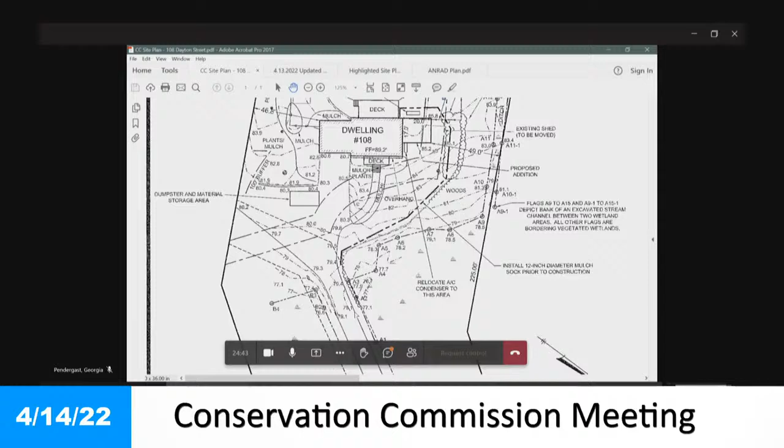You look at where we could put this addition, and this is the garage over here. You can't really walk through the garage and put the addition on. There's already a deck back here. You don't want to put it right on the front of the house. This is the only logical place to connect this addition, and the encroachment into the no-build zone is unavoidable.

Frankly, they would have liked to have had a larger addition, but through the architect and all through the process, we counseled them on the stringent requirements of your bylaw and minimizing the encroachment into the no-build zone.

Fortunately, this is a very big lot. It has an awful lot of land in the no-build zone. And so by the formula in your bylaw, you're allowed to actually encroach 20% into the no-build zone, assuming you've gone through the alternatives analysis and this doesn't have a detrimental effect on the interests of the act.

I've also given you a detailed discussion on that as well in my narrative. I'm not gonna go through all of your interests, but we end up, the grand total, ignoring the shed footprint, is 98 square feet, and that's less than 1% of all of the no-build zone on the property. So we're easily compliant with the criteria you've established in your bylaw to be able to grant a waiver.

The work zone is protected by a mulch sock right through here. We've offered some mitigation here in support of the 98 square foot encroachment. We show 100 square feet of area that's going to be vegetated with native shrubs - suggested the rhododendron, pepperbush, arrowwood, highbush blueberry. Other than the rhodies, they're all found in the adjacent wetlands, so it would be a nice expansion of the buffer zone. So it's a fairly simple project, fairly simple addition, and we're hoping the commission sees it as I see it.

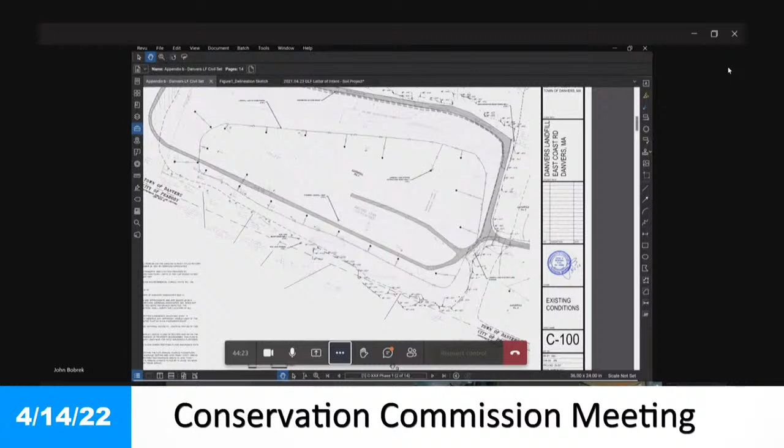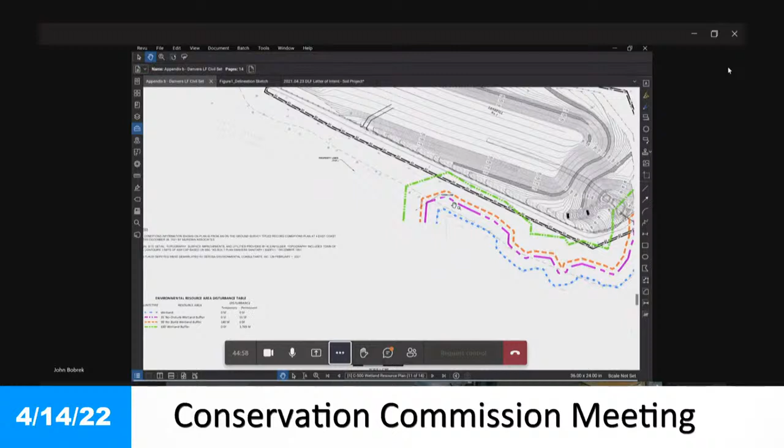Let me bring the next sheet up that shows the wetlands and the buffers. So this is our wetlands resource plan, and it shows the grades that we will be achieving by filling in this property. You can see there's wetlands to the south. The blue line on my screen is the wetlands line itself, which was delineated by DeRosa Environmental, and Mike is going to talk a little bit more about that in a moment. The magenta line is the 35-foot no disturb. The orange line is the 50-foot no build, and the 100-foot buffer is the green line.

So you can see we're along this area up here, we're within the 100-foot buffer, mainly for erosion controls. We've elected to install erosion controls on the outside, in this area outside of the access road, mainly because this site is going to be filled with soil over a 2-year period. So we're going to have soil moving operations going on, and I don't want these materials to be entering the slopes and potentially making their way around. I don't want any disturbance to be uncontained, so we have the erosion controls on the outside of the roadway.

Erosion controls are just going to be in the buffer zone to the east and to the north of the site. You can see there's no land disturbance generally within the buffer except for this eastern side. As I mentioned before, all the stormwater enters this general area of this low-lying portion of the site.

We are mimicking the stormwater patterns by creating a sloped top of site, which is going to discharge into a stone-lined swale, also lined with a landfill liner, an HDPE geomembrane. So once stormwater makes its way into the swale, it's off of the landfill itself, because the water will not be able to penetrate the swale.

Yeah, another great question. So we do have a plan to have a wheel wash device on site, and there's also a sweeper on site at all times. The asphalt roads are going to be swept, and there's also dust suppression in the stormwater pollution prevention plan, which includes broadcasting calcium that binds up soil and keeps dust down. There's also going to be adequate gravel and asphalt millings stockpiled on site, which the roads will be top dressed with to try to keep all the dust down as much as possible.

Okay, that's all I had. Okay, thanks Chelsea. Ann?

And you were referring to the stone-lined swales, the plunge pool, that you were going to do some reconstruction to slow the water down. What specifically were you referring to?

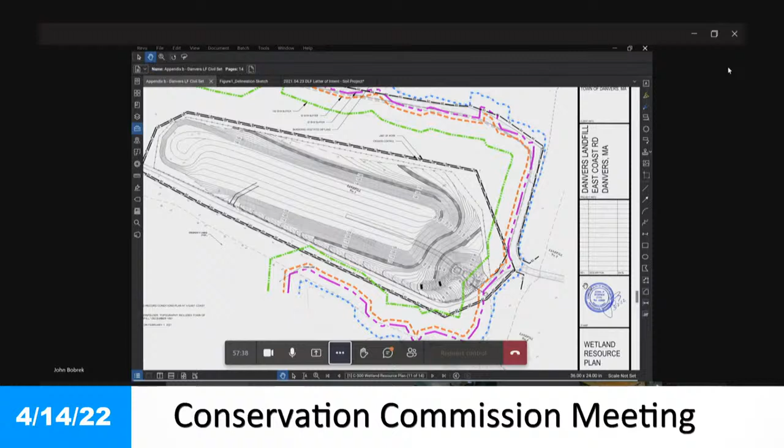So with the fill soil, there's going to be a modified stormwater pattern, but it's going to ultimately discharge in the same location. Currently, maybe I should go to the sheet. Bear with me for one moment, I can't remember all my sheet numbers.

So currently the stormwater is captured in this low-lying section along the access road at the bottom of the mound. There's an existing swale at the toe of the slope right now along the access road, and then there's a leaching catch basin here which collects the stormwater, or the stormwater runs across the road and into the swale, which discharges into the wetland. So there's a stone-lined swale in this location.

So with the work that we're going to do, we will be installing this new stone-lined swale along the southern edge just before the access road, which will have some stone check dams to slow the velocity of the stormwater down, and a plunge pool to collect the stormwater, which will then overflow through a level spreader into this detention pond. And then we will have an outlet orifice. I have a blown-up sheet of it also.

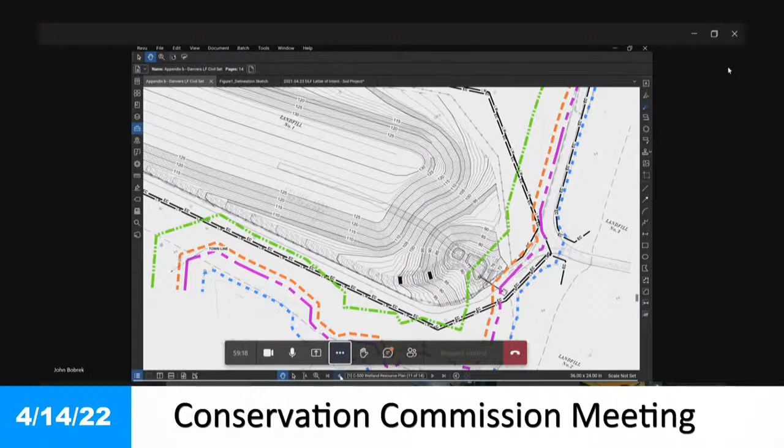So this is the actual blow up of the area. There's an outlet orifice that's going to be constructed, a precast manhole, which will have an outlet pipe over to the existing stone-lined swale area. So like I was saying, it's more or less mimicking what's happening now, except we're going to have a lot more treatment of stormwater than we did before. And this meets all of the Mass DEP stormwater design standards, where currently it's just a grass swale. So this will take down any suspended solids better than what's there.

And it sounds like that will have to be continually monitored over time as you increase the amount of soil in the middle. Is that correct?

Well, this will be like a permanent solution. There's gonna be some temporary measures during the filling process, like a temporary pond and temporary erosion controls to control any stormwater that has sediment in it. But when we're complete, this will be a permanent stormwater solution for this site. The site will be vegetated, and this will be a stone-lined swale, and this entire property will be maintained for a minimum of 30 years through the Mass DEP requirements.

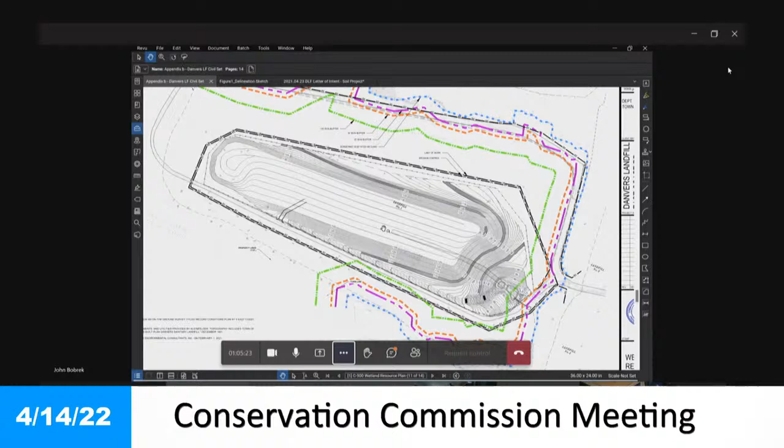Okay, and you're not anticipating any different stormwater impacts during construction that can't be handled by what you have there already? Is that a fair statement? No, that's why one thing we're working with the Solid Waste Division is some additional interim sketches and markups of what we could do. A lot of these things are subjective and up for discussion when you get a contractor on site, based on different people's experiences. But overall we're going to have a couple temporary basins and check dams to slow any runoff down, provide treatment, and control the area as much as possible.

Okay, could you give us an overview of how trucks will proceed when they come in to make a dump? Sure. Part of the submittal to Mass DEP included a traffic management plan. Initially, trucks are going to enter the site through East Coast Road. We're going to have a scale, I think we talked about it on the site walk. We're either going to have a scale up front, or we're going to have a scale out back by the leaf and yard waste paved area. So either way, trucks are going to make their way to this point, crossing the wetlands.

They're going to back in and dump their soil. They're going to back down the access road and dump, and we're going to create a large stockpile in this area. There's going to be equipment always on site and persons inspecting loads as they're dumped.

Alternatively, we're going to create a one-way access road where vehicles are going to come around the corner and tip the soil on the upland side as we get to that filling elevation, because ultimately there's going to be a point where we construct the permanent stormwater devices where we can't get through this way anymore. So it's a very subjective nature of construction, because we're not sure how fast the soil is going to come in over this two-year period of filling. We're trying to come up with measures to anticipate - when this happens, we'll do this, and when that happens, we'll do that.

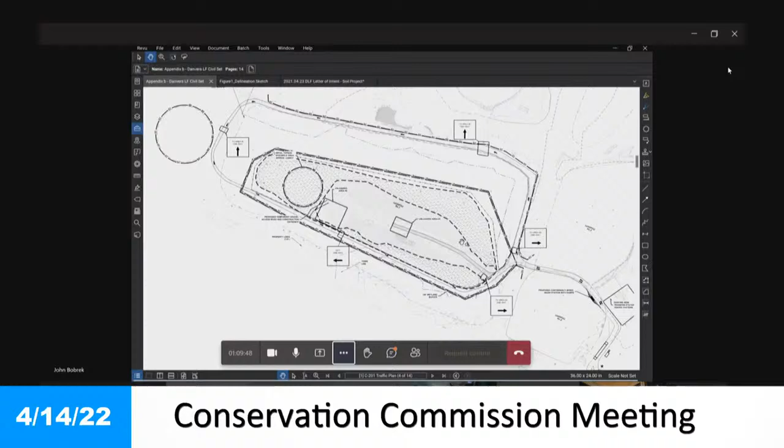Okay, good, thank you. Are there any questions from the audience? Mr. Duggan? Thank you, Mr. Chairman. Matthew Duggan, Selectman.

I attended a presentation last week. The town engineer, Stephen King, gave pretty much the same overview you just received here, but since that time I had a couple of questions. The first has to do with the wetlands that are potentially in the Peabody area, on the Peabody side of this boundary. So this bottom bold line on the lower left side, that parallels the town line with the city of Peabody.

And I've noticed on some topographical maps that there looks like there's wetlands that traverse that property line. The question to the presenter is, is that something that requires approval from the Peabody Conservation Commission? Or is it far enough away, more than 100 feet, that it doesn't? Through you, Mr. Chairman - did you hear that question, John? Yep. So it's beyond 100 feet from the city of Peabody's jurisdictional boundary.

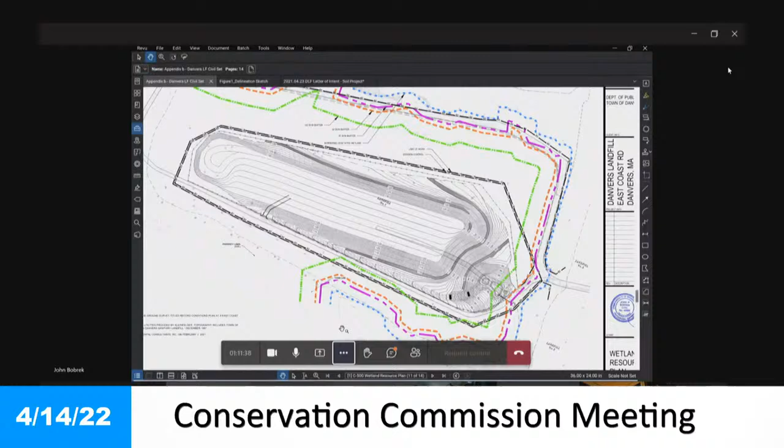And then just one other question about the temporary scale that you just mentioned. Can you just clarify where that scale's actually going to be located? Because the purpose of that is to not interfere with the normal traffic that goes back and forth to the scale house there. So can you just point where the temporary scale is going to be located?

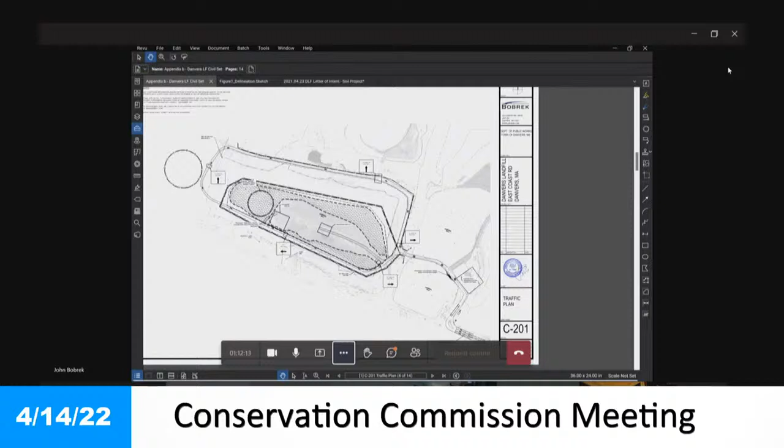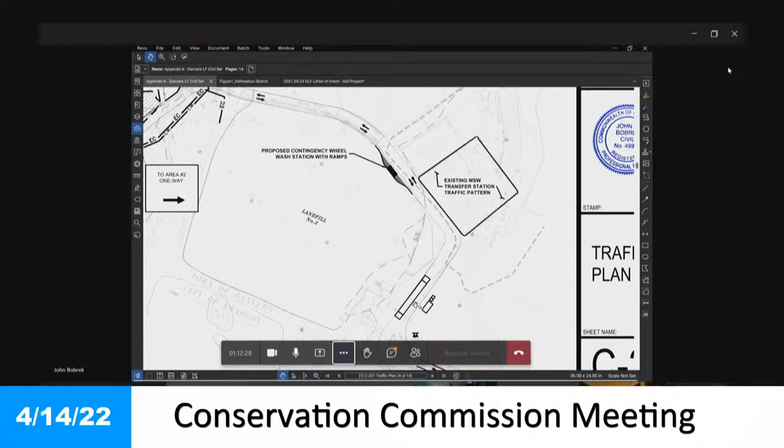Sure, not a problem. So currently, the town is evaluating several different scale options, and the location that currently exists for the transfer station facility is right here. There's a grass island in between, and there's a 30-foot wide or so paved area on the opposite side, which is actually part of Pope's Lane. So we're debating on installing a temporary scale there with some construction trailers, porta potties, what have you.

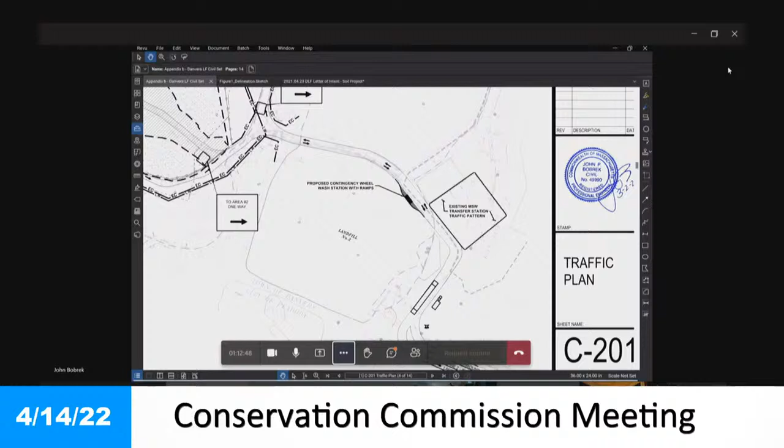Or the other option is to put it in the back area. If you've been to the site, you've seen the large JRM television trailer. It's a nice level area. One thing we're working out with the scale company is what's the most long-term best solution to place this scale. The traffic pattern would be to come in, enter through that side road, not bother the ongoing transfer station operations, take the road out back to get weighed in, and then come back out here. They can also drive back through, or run the loop on the backside of the transfer station. We've been discussing these operations with Covanta, and no big headaches yet, so.

Okay, all right, sounds good. Thanks for that clarification, I appreciate it. That's all I have, Mr. Chairman. Thank you. Is there any other public comment?

Hearing none. Chelsea, did you have something you wanted to ask? No, I said thank you.

Okay, so I guess that's enough for the public hearing, so if we can make a motion to close the public hearing, and then we'll proceed with our voting. I'll make a motion to close the public hearing for 105 Pope's Lane, DEP file number 14-1379. Motion's been made to close the hearing. Is there a second? I second the motion. All in favor? Aye. Aye.

Okay, just a general question to the board. Is there any further comments, questions? Everyone thinking that this is a good project? If not, now's the time to say so. I'm okay, on board. Hearing none.

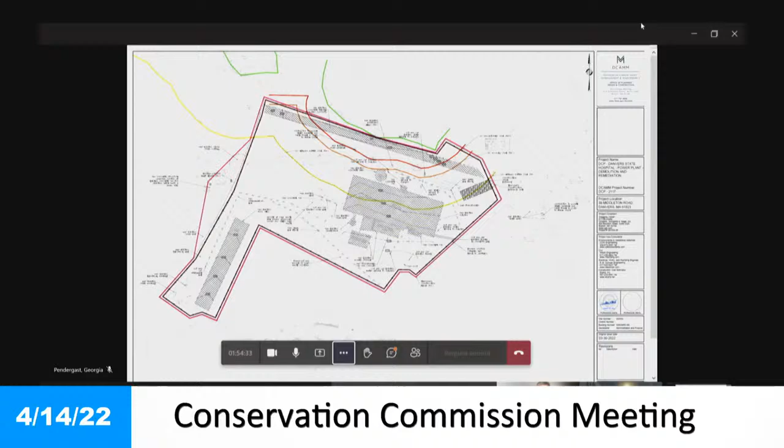All right, great, that's great. Thanks for the information. That's it? Yep, all set. Any other public comment?

Hearing none. This is an open hearing, right, Georgia? Okay, so someone make a motion to close the public hearing. I'll make a motion to close the public hearing for 99 Middleton Road, DEP file number 14-1382. Motion's been made. Is there a second? I'll second. All in favor? Aye.

Moving on, Georgia, just a bit of clarification. Do we need to vote on a waiver? We don't. The only work within the 35 and 50 is temporary alteration. You would need a waiver if it was permanent alteration. Okay, good, you would want an order of conditions. Yes. Peter, we want an order of conditions? That's what we're going to vote on next. So if someone could make a motion, we could issue an order of conditions unless someone has an objection.

If someone's willing to make that motion, please do. I'll make a motion to issue an order of conditions for 99 Middleton Road, DEP file number 14-1382. Motion's been made. Is there a second? Second. All in favor? Aye. Okay, good enough, thank you.

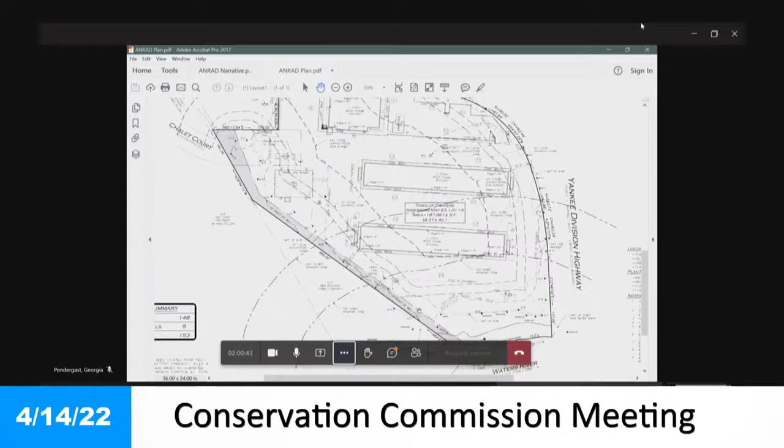I'll just ask one quick question - has any thought been given to the impact of sea level rise, and the shrinking of the property, the usable property? Sure, so at this time that hasn't been considered by our office. I don't know if Allen and Major has looked into that. At this point we were just trying to confirm the resource areas on the site, so we delineated the high water line as we found it.

Go ahead please - good evening members of the commission, for the record Tim Williams with Allen and Major Associates. Essentially what we're here for is just to delineate the wetlands. The developer has the intent of redeveloping the site, but the first step is to lock in the resource areas. This project is going to require notice of intent, we're going to have to go through the planning board, and it's also going to be subject to MEPA. So this is really the first step in the process, just to lock these in so he knows what the resource areas are, so he can start putting conceptual plans together for what the end user is going to be.

Okay good, thanks. Mike, you're chomping at the bit, go ahead. Well, you're asking us essentially to agree where you've shown the no build or buffer zone areas, but we really would need to go out there before we say yeah you're right, that's where they are. It seems to me we need to go out and actually look. Yeah, no, I don't disagree. We're just looking for your confirmation on the wetland resources that were flagged. No, we're not gonna do that yet - we could schedule a site walk tonight. As you recall, with the last ANRAD process the commission wanted to hire a consultant. If you go through the memo and the conversation here, if the board wanted to do a consultant they could, and then they would come back to the next meeting. Okay, would we first do the site visit and then say we better get our own? What I would suggest is that you would have the consultant first.